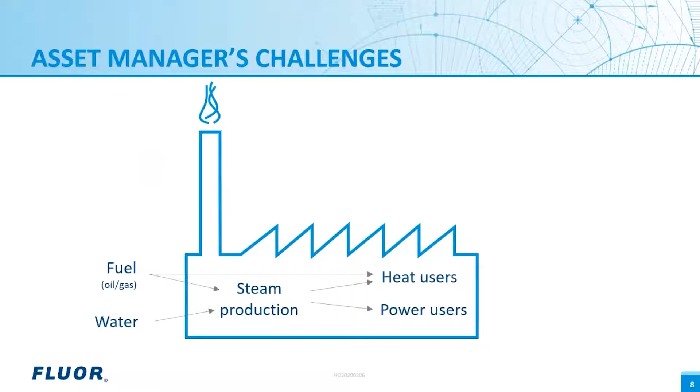Are your steam generating systems and turbines becoming obsolete and requiring ever-growing maintenance needs? Are you looking for ways to reduce NOx or other emissions for local regulatory compliance? Are you looking to expand your facility, but your utility systems are maxed out, or worse, out of balance?

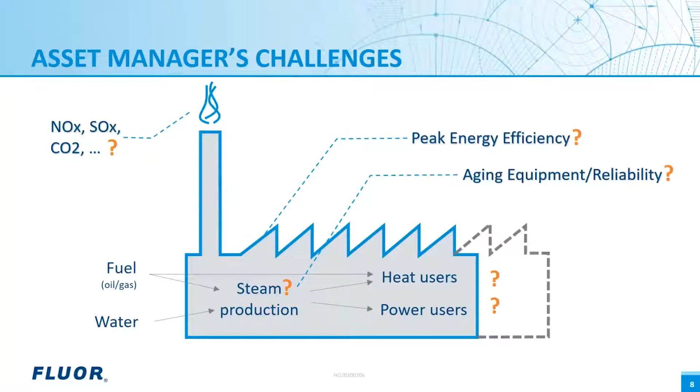Do you want to rebalance steam and electricity usage, but are concerned about what to do with excess fuel gas? Does a facility-wide energy optimization sound intriguing, but also intimidating? Lots of question marks, and especially because everything is linked, it might be intimidating to start to change things. Where to start and what are the knock-on effects on existing systems, including the flare?

However, in this presentation, we'll show you that, properly applied, electrification may help you address many of these challenges and really future-proof your asset. Today, I will be talking about electrification of industrial facilities, which simply means designing new or revamping existing facilities to use more electricity instead of steam and fuel gas for your energy needs.

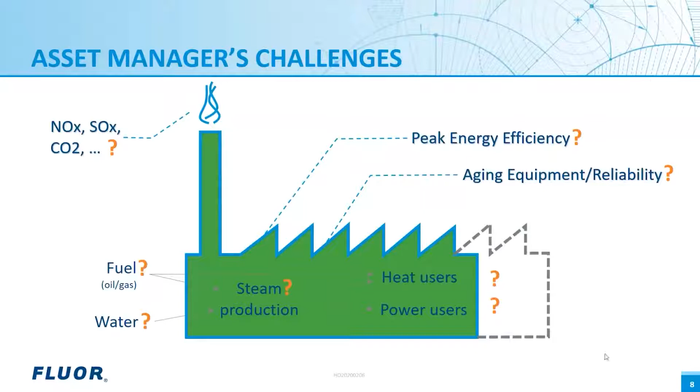So let's answer these questions one by one. Is your facility operating at its peak energy efficiency? Many operators see a noticeable improvement in their energy intensity index from electrification.

The calculations are based on efficient electricity production compared to less efficient steam boiler production. Improvements in energy intensity are often part of a facility's strategic plans and goals and can have a noticeable impact on their operating costs.

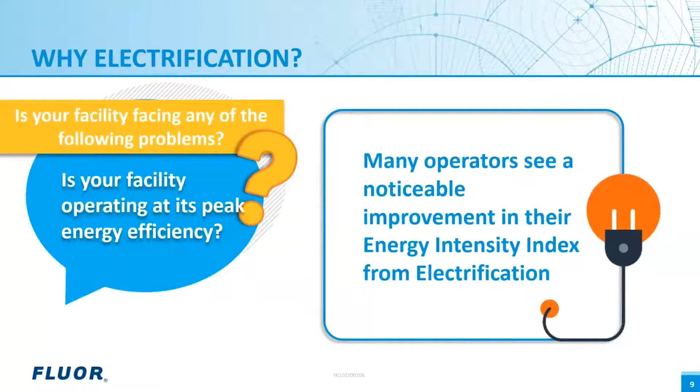Are your steam generating systems and turbines becoming obsolete and requiring ever-growing maintenance needs? Owners may have steam boiler maintenance and equipment replacement or emissions requirements that will require investment. Some of this investment may be better spent on electrification. Overall reliability may increase, which can have a big impact to the bottom line.

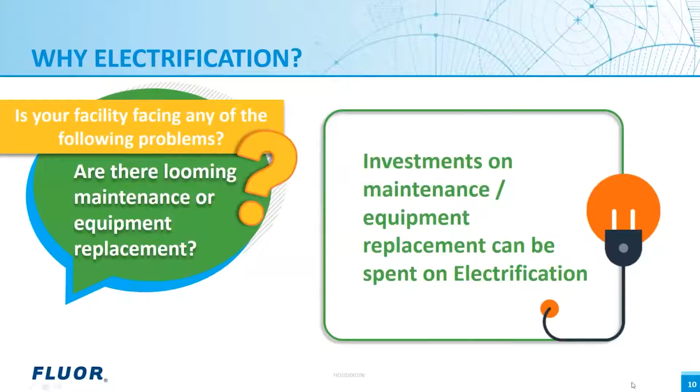Are you looking for ways to reduce NOx or other emissions for local regulatory compliance? You may be facing looming environmental regulations that will require investment in new SCRs for your steam boilers. An electrification project can reduce your steam demand, therefore reducing the cost of environmental upgrades.

This can be even more significant when you consider that emissions reductions from electrification may fit well with other strategic plans that could cause increases in emissions from process heaters. The emissions reductions in the steam system can be used to offset increases in other heaters. It's not just about NOx. SOx and particulate matter emissions can also go down, producing credits that can be valuable for your other strategic goals.

Are your utility systems maxed out, or worse, out of balance? If you have limitations on your steam balance, cooling water balance, or natural gas import, you may not be able to expand or do other projects without doing some electrification.

Can you purchase electricity for a lower cost than import natural gas? If so, this can also reduce your operating costs.

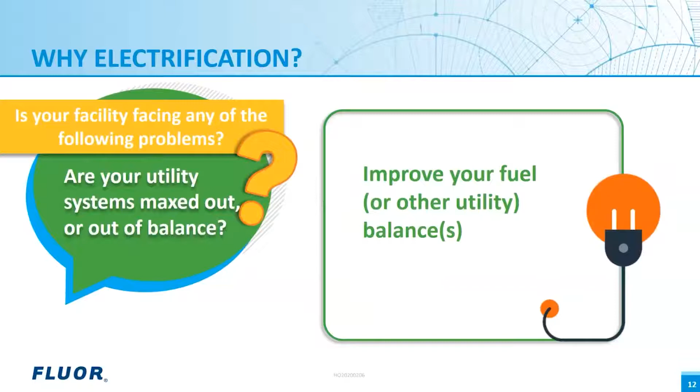Do you need to rebalance the steam and electricity usage, but are concerned about what to do with excess fuel gas? There are potential synergies in executing an electrification project with a project to increase LPG recovery from the fuel gas system. I'll discuss this in more detail later in the presentation.

Burning less fuel already means that you'll make less CO2, which is a strategic driver for many companies. But by recovering more LPG and heavier material from your fuel gas system and replacing it with import natural gas, you'll further reduce CO2 emissions, even if your fired duty does not decrease.

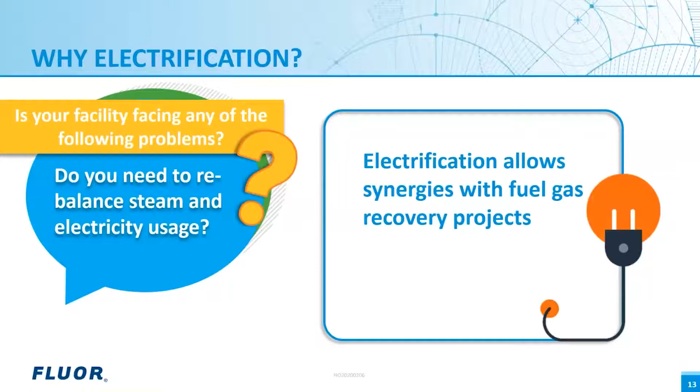In most markets, LPG products and other liquid products are much more valuable than replacement import natural gas, so there can be a good benefit to the bottom line in addition to the CO2 reduction impact.

Lastly, does a facility-wide energy optimization sound intriguing, but also intimidating? If you're planning a strategic reconfiguration based on shifting crude supply and/or market-driven product changes, that may be an opportunity to replace aging steam-driven compressors with new motor-driven compressors that have a fit-for-purpose duty specification.

It's important to remember that electrification is a solution to the many opportunities to optimize your facility that you may be facing. Each of the opportunities discussed have a set of economics that justify the solution that you ultimately choose. One thing they may all have in common is LCFS, or low carbon fuel standard credits.

The low carbon fuel standard is a rule that's been enacted to reduce the carbon intensity, or CI, in transportation fuels as compared to conventional petroleum fuels, such as gasoline and diesel.

The purpose of this standard is to decrease the carbon dioxide emissions that are associated with vehicles powered by various types of internal combustion engines, while also considering the entire life cycle, oil well to wheels, in order to reduce the carbon footprint of transportation.

Originally enacted in California, there are now local and national mandates in several countries and regions around the world.

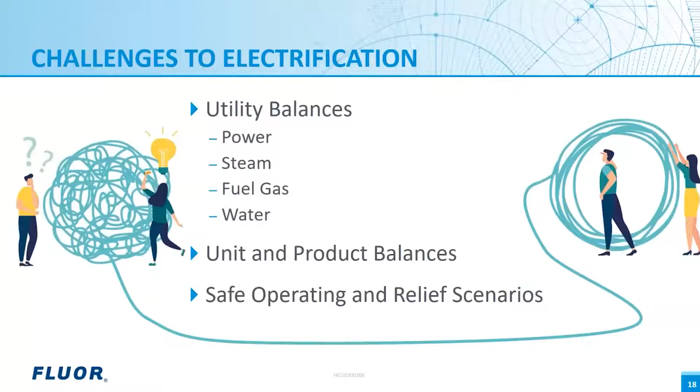The challenges of a major program that includes electrification may appear daunting. We can help you identify the best options that will improve your operating costs and help you achieve your strategic goals. The challenges associated with electrification can be overcome or mitigated. We know what these challenges are from working on many complex projects, and we know how to address them. If you're not sure where to begin, we can help you develop a plan that starts with a small strategic study to determine your current status and where the potential heavy hitters are that can make a difference.

So what are ways that industrial facilities can electrify? There are three primary ways that can be considered: heat pumps instead of reboilers and condensers for distillation columns, electric heating instead of steam or fuel-fired heaters, and electric motors instead of steam turbines. All three of these can be important and have large impacts in the right situation. A fourth related concept is utilizing a cogen-type facility to produce electricity and steam, instead of using import electricity and steam boilers. We'll discuss this option briefly in a bit.

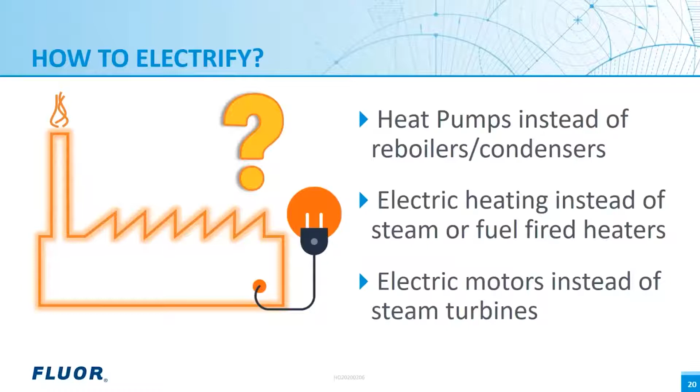So let's talk about these three items in a little bit more detail. I'll start with the first one: using a heat pump designed to power the reboiler and condenser in a distillation column. Historically, these designs have been called heat pumps. They're also called mechanical vapor recompression, or MVR.

It's also possible to design a distillation heat pump with a separate fluid in a closed loop that is compressed, condensed in the reboiler, further cooled by dropping the pressure across a valve, and then used to cool the overhead condenser. But all the examples I've seen in industry are like the example shown here, where the overhead vapor is the heat pump fluid. Heat pumps can have significantly better energy efficiency than traditional reboiler condenser systems, and save on both the reboiler side, which is often steam, and the condenser side, which is often cooling water. Energy intensity reductions of up to 90% are reported in the literature.

Heat pumps work very well for systems that don't have a big temperature difference between the top of the column and the bottom of the column. Propane-propylene splitters are a good example of this type of column. There are similar advantages for ethane-ethylene splitters in steam cracker units and isobutane normal butane splitters. There are also applications in aromatic complexes and methanol production. For most other distillation separations used by refineries and petrochemical complexes, the much larger temperature change across the column significantly reduces the value of the heat pump approach and makes it impractical.

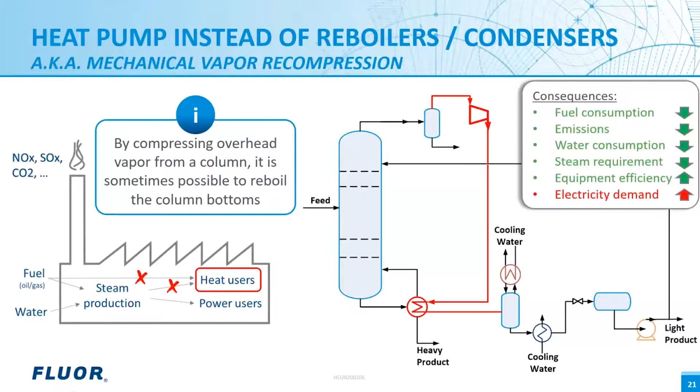Now let's talk about the second item. For steam heating needs, there are two ways to electrify: either replace a steam heater with an electrically heated exchanger, or replace a fuel-fired steam boiler with an electric boiler.

Controls must be designed to provide protection against overheating the process for upset, low flow, and blocked-in scenarios. Like the heat pump, this concept can reduce fuel, steam, and water consumption, reduce emissions, and improve efficiency, with the cost of higher electricity demand and potentially less temperature controllability.

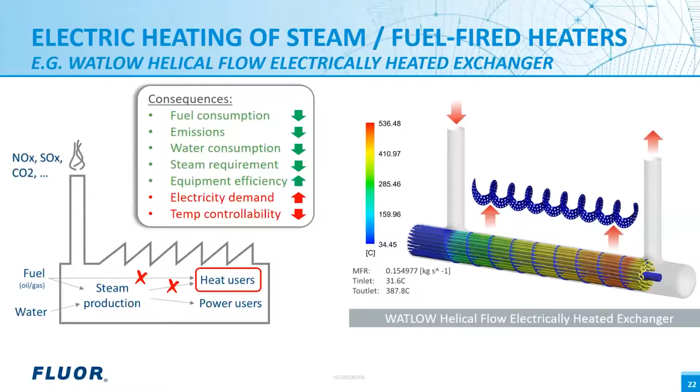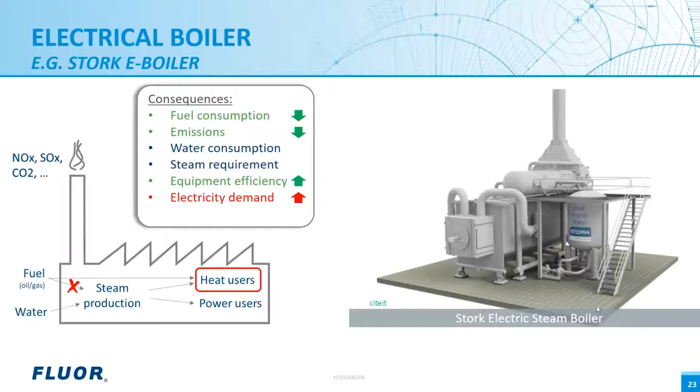Note that many processes use live steam injection into the process, so it's not practical for these processes to replace all of your steam needs directly with electric heaters. This is an advantage of an electric boiler—it can address steam injection and steam heating needs. This concept can reduce fuel consumption, reduce emissions, and improve efficiency with the cost of higher electricity demand.

Now I want to talk about the third idea on the list: using electric motors instead of steam turbines for large compressor and pump drivers.

We've helped U.S. refiners look at the impact of replacing large steam turbine drivers with electric motors. This has resulted in positive projects at multiple refineries. Improved energy efficiency, reduced emissions, improved reliability, and lower water consumption have been obtained, and some refiners have avoided additional steam boiler investment. The project can impact the power infrastructure, steam, fuel gas, and cooling water systems, as well as potentially impacting ISBL controls and relief systems.

If replacing the driver makes sense, you may want to consider if installing a whole new compressor is a good option. If there is adequate plot space available, installing a whole new compressor with an electric motor may not cost more when the cost for doing work during a turnaround versus new construction outside of a turnaround is considered. This can also allow you to replace an aging compressor with a new one and potentially optimize it for your current operation instead of the way the unit was operated decades ago when the compressor was originally specified.

Looking at the scorecard of impacts, this idea can reduce fuel, steam, and water consumption, reduce emissions, and improve efficiency, with the cost of higher electricity demand.

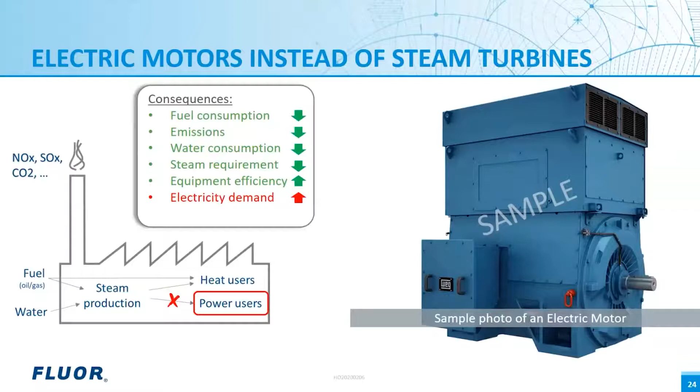When replacing a steam turbine with a fixed-speed motor, this impact needs to be carefully considered. The variation in process conditions, particularly the gas molecular weight, must be evaluated. All possible operating conditions should be considered. Compressor surge and spillback controls may require modifications to satisfy requirements, and energy consumption may increase for some cases due to excess flow or pressure being produced by the compressor.

The suction throttle valve and spillback valves may need to be modified or replaced to provide the flexibility that was previously provided by varying the turbine speed. These issues can almost always be addressed, but they need to be considered.

Of course, installing a variable speed motor is an option, but for large motors, there's usually considerable additional cost and space required. A better option may be to install a variable speed gearbox to convert the fixed speed motor to different speeds as required to optimize the compressor operation.

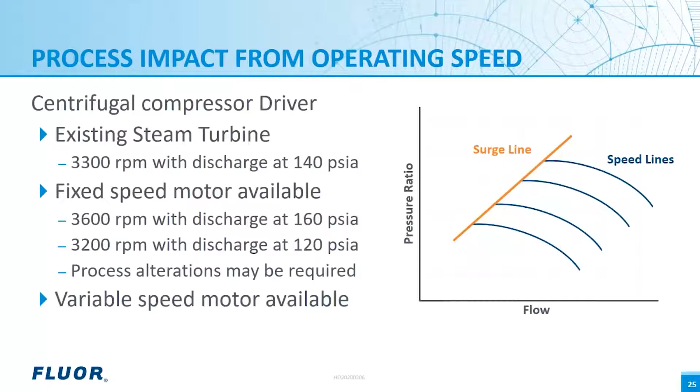I talked a bit ago about some of the high-level utility impacts. I'd like to now go into a little bit more detail on a few of them.

Electrification can have a big impact on the steam balance, which can have a big impact on the fuel balance. Replacing any fuel gas fired heaters with electric heaters will also have an impact on the fuel gas balance.

Many refiners run close to fuel balance and would be long on fuel gas if they do the electrification that they want to do. If this is an issue, there may be options for recovering more LPG and heavier material from the fuel gas pool, or possibly make less material that ends up in the fuel gas system.

Projects to increase C3+ recovery in gas plants can have a very good payout in selling more LPG product and also support efforts to electrify.

If this option is pursued, product storage and transfer logistics will need to be understood so all the requirements are addressed. You may also be able to reduce the amount of heavy material that ends up in your fuel gas system by making changes in conversion units, such as hydrocrackers and FCC units.

By changing the catalyst and operating conditions, you can crack less and make less material that ends up in the fuel gas system. If you're making changes to reduce the amount of LPG material in your fuel gas, you'll need to understand how this can affect the heating value of your fuel gas.

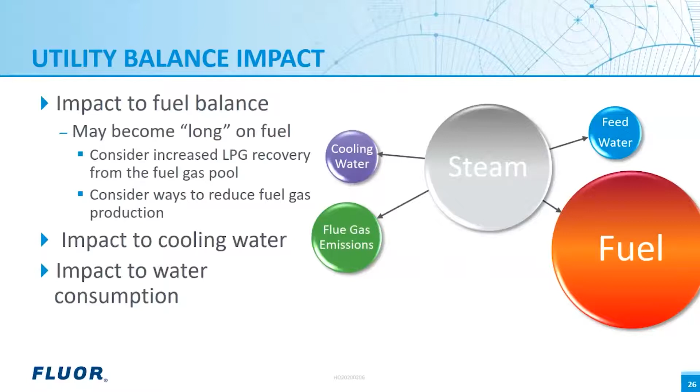There are two main types of steam turbines, condensing and back pressure. There are also condensing turbines that extract steam at one or more intermediate pressures.

Condensing turbines exhaust the steam at a very low pressure, at a vacuum, well below atmospheric pressure, and the steam is then condensed into water, usually in cooling water exchangers, although air coolers are sometimes used.

Back pressure turbines take a relatively high pressure steam, say 600 psig, and exhaust at a lower pressure, say 150 psig. Since there's much more energy in 150 psig steam than steam at a vacuum, a much larger steam flow rate is required for the same driver load for a back pressure turbine compared to a condensing turbine.

So back pressure turbines are a good fit for a facility if there's demand for the lower pressure steam. However, if your demand for the low pressure steam has changed over the years, the existing turbine may be producing a lot of low pressure steam that you really don't want.

This can provide a good incentive to replace that turbine with an electric motor. We've seen simple payouts of 2 years or less for capital projects for replacing condensing steam turbines with electric motors, if incentives for reduction in the CO2 emissions are included.

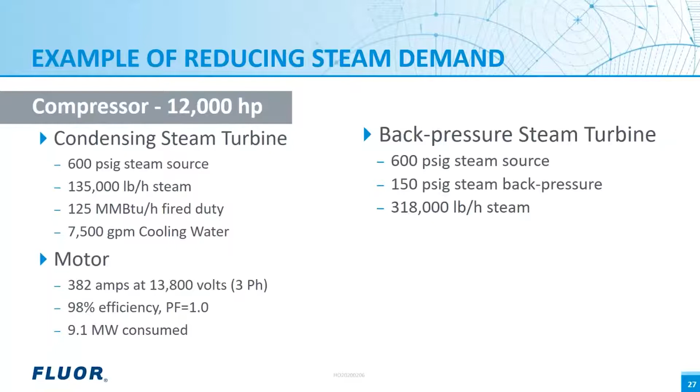Payouts can even be significantly better than that if capital projects for steam system upgrades for reliability or environmental compliance are reduced due to the electrification project.

Another option that could be considered is installing or expanding a cogeneration unit. These units convert fuel into electricity and a heat source, typically steam. These systems are now often called CHP, for combined heat and power. While cogeneration units have been in use for some time, modern CHP facilities using turbines can achieve much higher efficiencies, as turbine technology has improved over the decades.

As previously mentioned, if a facility has plans to replace a significant amount of steam consumption or steam generation with electrical energy, it may be long on fuel gas. Most refineries and petrochemical complexes have units that produce methane and/or hydrogen that may not have a good home if it's not used to generate steam. A new cogen unit can become the sink for this produced fuel gas.

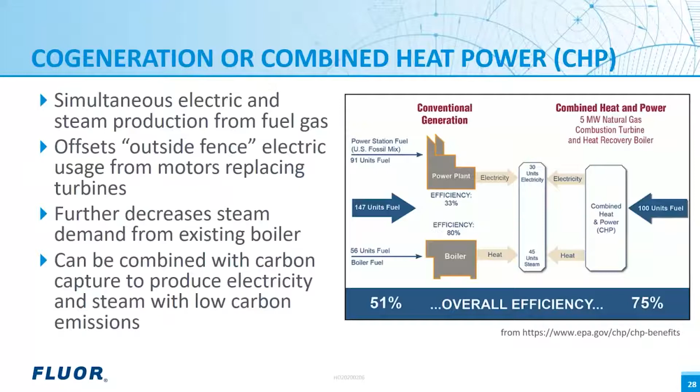A design for a new facility can use any of the ideas that we discussed for revamping existing facilities. Are there other ideas that could be used for new facilities that may not be practical for revamps? A lot of people are looking at this.

Let's take the example of a naphtha steam cracker that produces ethylene, propylene, and aromatics, primary building block chemicals used for plastics production. The reaction takes place at a high temperature, typically about 850 degrees centigrade, and it's an endothermic process, so you need to add a lot of additional energy to keep the reaction going.

A lot of attention is focused on this topic. BASF has announced they're investigating designing an all-electric heated naphtha steam cracker, and Shell and Dow have announced a joint venture to develop an electric heated steam cracker. We've done some calculations.

For a typical naphtha steam cracker that makes 1,500 kTA of ethylene, 1,400 megawatts of absorbed duty would be required to provide the reactor heat. So this unit would require electrical consumption similar to what many large commercial power plants produce. This is technically possible, but it will be expensive.

BASF mentions looking to revamp existing units with electric heaters in the future. It seems this would be a major and costly revamp. It might be more applicable for a new unit design.

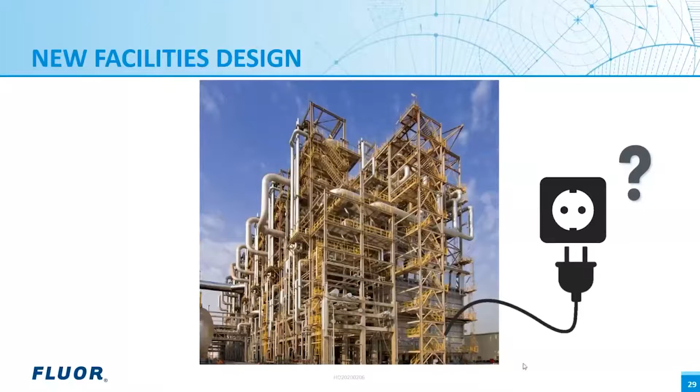If your goal is to produce the steam cracker products with minimum CO2 emissions, there are some other options. One option would be to use a fired heater, but use hydrogen as the fuel. This is assuming that the hydrogen is either green or blue hydrogen and had minimal CO2 emissions during its production.

Calculations show that 460 kTA of hydrogen would be needed to provide the fuel for our 1,500 kTA steam cracker, equivalent to 530 million standard cubic feet per day. Also technically possible, but costly. It may be possible to revamp existing units that use fuel gas to use hydrogen fuel, but would likely require infrastructure and fuels controls changes.

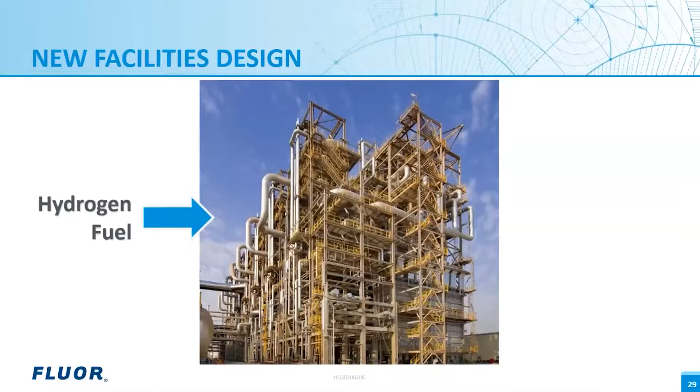There's a third option that may be the best choice. Use fuel gas as is done in all steam crackers today, but capture the CO2 from the flue gas. This technology is available today. In fact, Fluor licenses such a technology, the Econamine FG Plus process. Of course, you need to have a disposition for the recovered CO2 for this option.

With the first and second options, a major issue is, what do you do with the methane produced by the steam cracker process? Steam crackers produce a lot of methane as a side product. In existing units, this gas is burned in the process heaters. If the heaters are electric, this methane needs to be sent somewhere else.

There may be synergies with an electric steam cracker combined with a GTL or gas to liquids process to convert the methane to a liquid product, or possibly with a syngas operation to make methanol or hydrogen.

For the second option with a hydrogen-fueled heater, the methane could be converted to hydrogen, but you're still expelling the CO2 unless you recover it in the hydrogen generation process. You might be better off just going with the third option and recover the CO2 from the flue gas directly.

In summary, there are ideas and options available, but the best choice may depend on what your goals are and on location logistics.

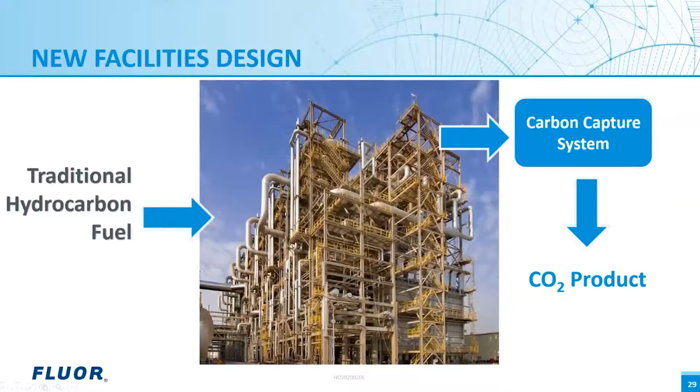Giovanni, why don't you talk a little bit more through the electrical infrastructure impacts to electrification?

In our experience, the selected process loads that are converted from steam to electricity require large motors, such as the 12,000 horsepower example on a previous slide. We have seen loads ranging from 5,000 to 20,000 and even larger. Motors of this size have a strong impact on the electrical system, which needs to be studied carefully.

There are three key electrical system studies to be performed to assess the system: load flow, short circuit, and motor starting. These are complex studies performed by an experienced Fluor electrical engineer using commercially available electrical analysis simulation software, such as ETAP, SKM, and others. Each of these studies will help with the assessment of your system. You need to know if you have the capacity to support the new load, if the existing equipment is ready to support the additional motor load contribution, and finally, can the motor be started without impacting the system voltage?

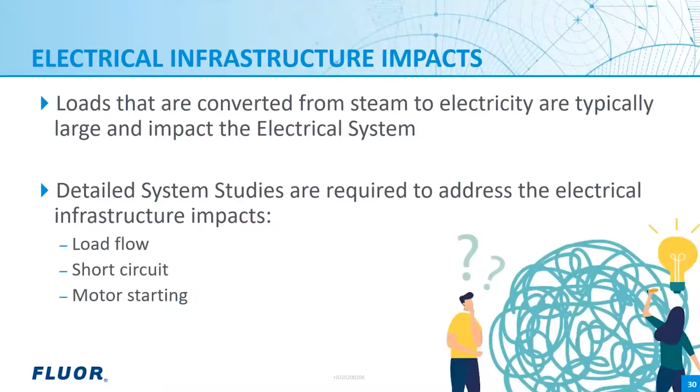Next, when the electrical system is assessed, you will be able to define the upgrades of the electrical infrastructure. These upgrades may include additional utility power, including new transmission lines to take delivery of power at a higher voltage. The new lines may be 34.5, 69 kV, or even higher, or if the facility has a cogeneration plant, expanding it with new generation.

The new electrical configuration will impact equipment in the main and unit substations. Most likely transformers, switchgear, and other power equipment will require upgrades. The new electrical system will likely have dedicated substations for these large loads. Let's not forget the impact to the facility's underground and above ground electrical infrastructure, and the associated impacts to pipeways and other structures that need to support the new conduits or trays that will feed these loads.

Lastly, design must consider construction and cutover challenges. Since this is all being done in an existing operating facility, the electrical upgrades need to be well planned. Electrical work requires equipment to be de-energized, so the tendency is to schedule the work during a turnaround or scheduled maintenance to minimize the impact to the operating facility. That imposes a significant constraint to the project schedule.

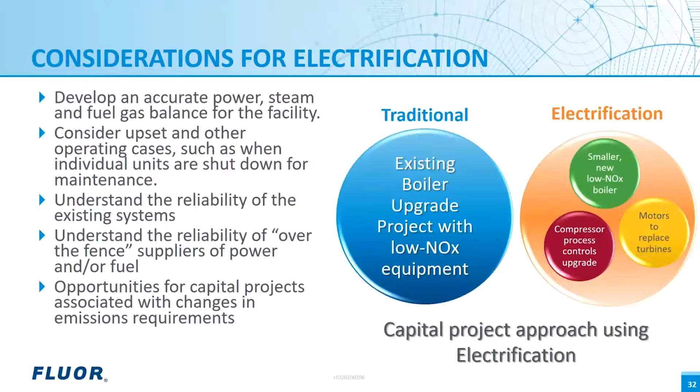In conclusion, to find the best project for your facility, you should start with high-level goals, develop a good understanding of where you are, compare options, understanding which parts are independent and can be evaluated individually, and which parts are interrelated and need to be considered as a group.

You'll want to understand the benefits: the reduction in operating cost, improvement in energy efficiency, and reductions in emissions and water consumption. And of course, you'll need to understand the cost: the capital cost to implement changes, systems upgrades required both within the facility and by outside suppliers, and the process ISBL and OSBL impacts, both positive and negative, for each option.

After all, it doesn't help you if a preliminary study makes an option look promising, but impacts that were not initially considered make the option much more expensive or not practical.

Fluor has a long history of helping our clients perform these types of studies. We have the experience, tools, and expertise to help look under every rock, both to find hidden opportunities and to discover all the impacts, both positive and negative, for each option. If this sounds intriguing to you, please contact us and we'll discuss your specific situation and how we can help you find the right solution. With that, we'd be happy to address any questions or comments that you have.

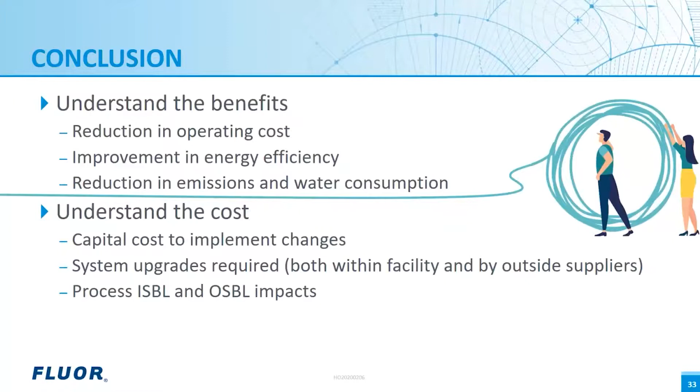Thank you, James and Giovanni. Let's take a minute and address the questions that have come in. Just a note to everyone on the line, please do submit your questions to all panelists so that we can include them in the next 15-minute Q&A period. The first question: does electrification make sense if my facility does not receive an economic benefit for a lower carbon footprint?

Thanks, Maureen. I'll take that question. The first electrification project I worked on was to replace a steam driver in a Louisiana refinery over 20 years ago. The value for the project didn't have anything to do with reduced CO2 emissions. It was driven by improvement in the steam balance and the cost benefit they received from buying electricity instead of importing natural gas. So yeah, electrification can make sense in a lot of cases, even without the economic credit for reduced CO2 emissions.

All right, great. Next question. When replacing a compressor driver with an electric motor, you mentioned available existing plot space. If plot space is not available, is it still possible to be cost-effective if a plot relocation of the compressor is required to change the driver?